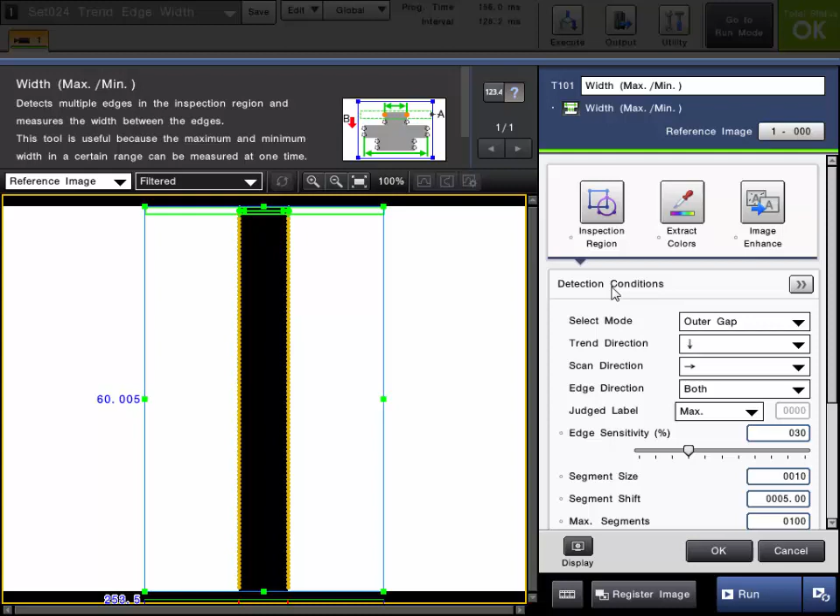The next step then is to set up the detection conditions for the Trend Edge Width tool. So one of these settings is called the mode. You need to select which mode you're going to use. Now, when you're using a rectangle or rotated rectangle inspection region, the mode will be either outer gap or inner gap. And this really only makes a difference if you have more than two edges. In our example, we only have two edges, so that's the only edges we have to work with.

But if you had a part that had more than two edges, like a part that was hollow, where it had at least four edges, you can choose to measure the outermost distance, which would be the distance between the outer two most edges, or you can change this to inner gap, and what that will be is kind of an inner diameter, if you will, or inner gap, so the distance between the inner two most edges. In our example, like I said, we have two edges, so it doesn't really matter, but we'll go ahead and leave it at outer gap.

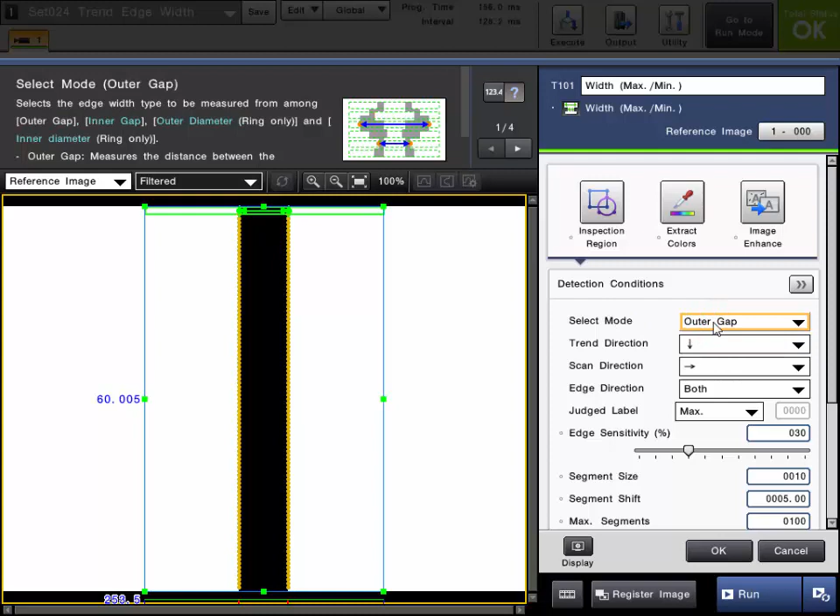Now the trend direction is the next setting here, which is already set up the way we want it, but it's the way it will break up the region into many smaller segments and perform those edge width measurements. So right now it's set for top to bottom, but you could also choose left to right. But top to bottom is what we want, so what it'll do is it'll start at the top, break it into a segment here, shift down by a certain amount, perform another segment measurement here, and so on.

So it'll perform a bunch of edge width measurements starting from the top and working its way down. You can see that's indicated by these yellow points here. Each one of these pairs of yellow points here is an edge width reading, so it's performing many edge widths all in one.

In this setup, we have some nice clean edge points to work with, so we don't really need to adjust anything. But in the actual setup, if you need to, you can adjust all the detailed edge detection condition settings like scan direction, edge direction, etc.

You can also adjust all the detailed segment conditions like segment size and segment shift. We're going to leave these the default setting, but if you needed to detect finer details, you can change the size and shift and max segments accordingly.

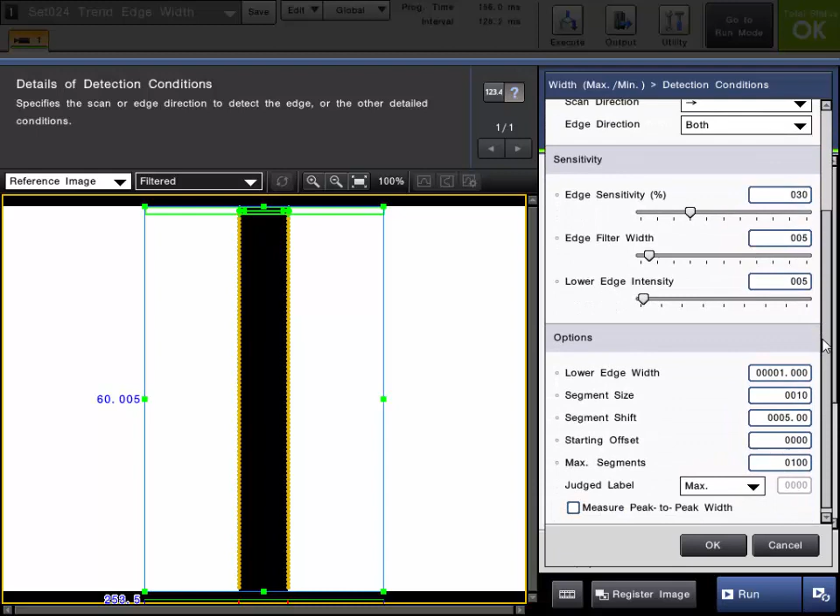You can also go into the detailed detection conditions here, and one setting that's unique to the Trend Edge Width tool is called Lower Edge Width setting. This is basically a filter condition where if you have some noise in your detection where you want to filter out a width of a smaller size, you can set that here.

Default set to 1, but for example, if I set this to 10, it would eliminate any width measurement that was less than 10. So it can be used to filter out some unwanted conditions there.

The last step then is to just simply set up your judgment conditions, which is the pass-fail criteria of the tool. As you can see, we have the measured values displayed here, the minimum width and the maximum width. In this case, it's the perfect golden part, so the width min and width max are identical, but it depends on the part measurement. So we could set tolerances accordingly.

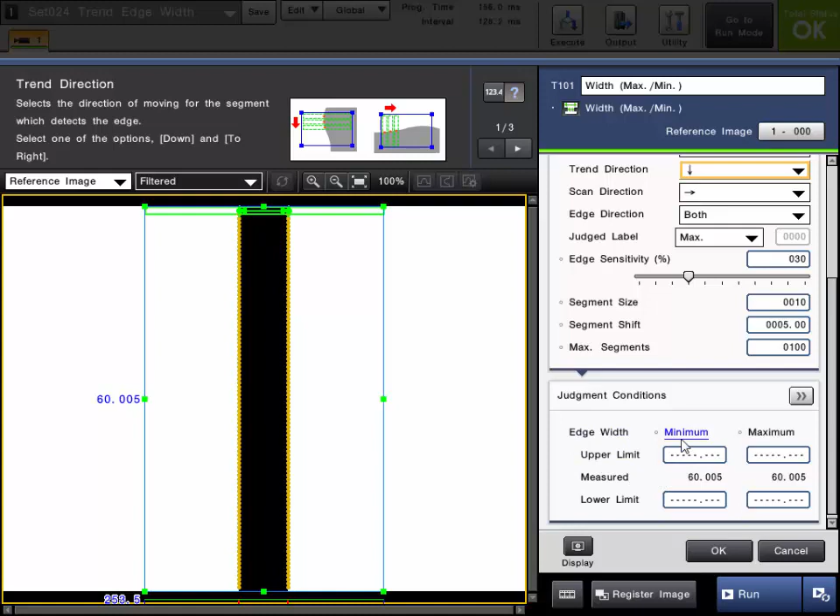So if 60 pixels was our ideal part and we wanted to fail it if it got, let's say, 5 pixels bigger or 5 pixels smaller, we can set the limits accordingly. So for the minimum width measurement, we'll go ahead and set the low limit. In our example, if we want 5 pixels, we'll set it to 55. So if any of the edge width measurements fall below 55, it will fail.

And on the upper end, we'll set an upper limit on the maximum value. So again, we'll set this to 65. So if any of the widths that are measured go above 65, it will fail. Now, if that's all you want to set, you're ready to go.

But if you want to go into the detailed judgment conditions, another setting that you can set is the detected segment condition here. In other words, how many measurements are being taken. So in this case, you can see we're measuring 95 edge widths. So 95 of those segments have a valid edge width measurement.

So if we want to detect a breakage, let's say there is a break in the part where the width measurements were okay, but there's a break, we can put a limit on the detected segments as well. So in this example, I'll go ahead and just put a lower limit of 95 on my detected segments. So if there's any breakage at all where we do not detect a width, it will also fail the part.

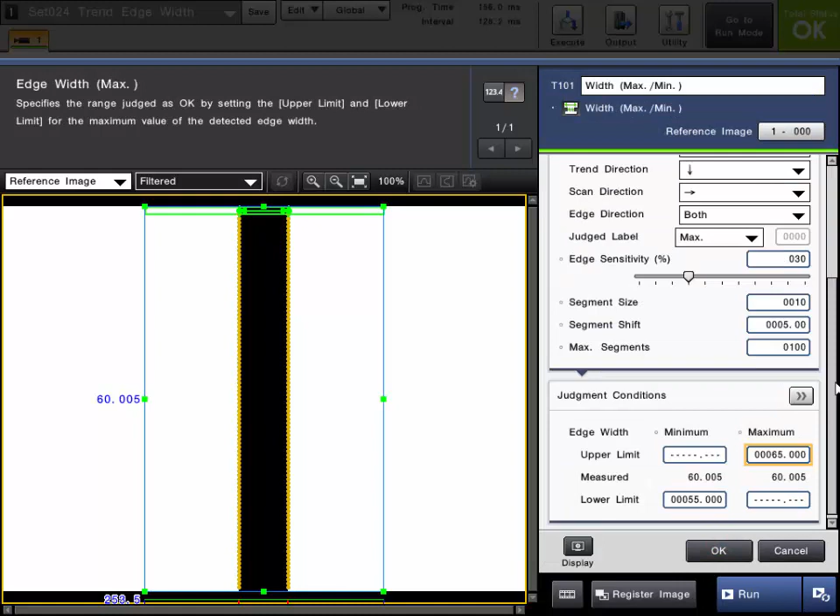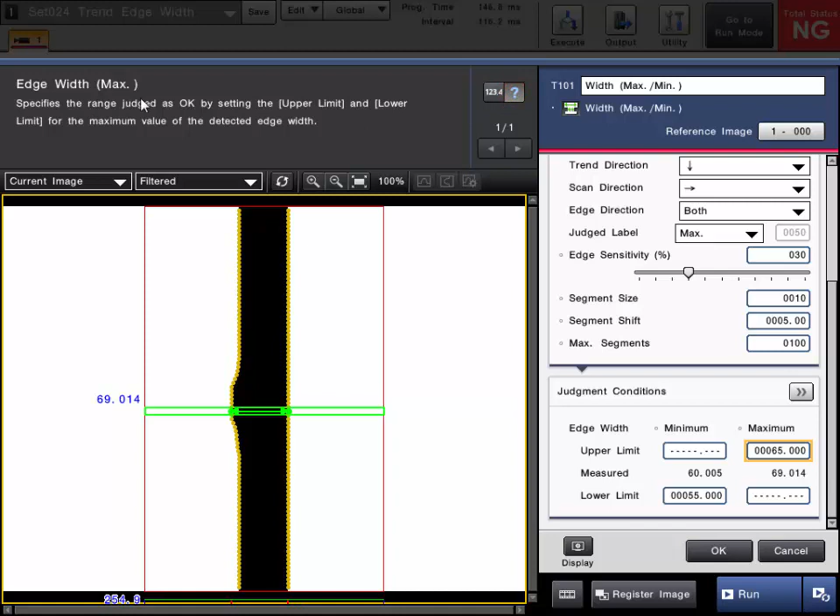Now, we've established our tolerance off the reference image, but while you're in the screen, if you want to work off of some of the current images, you can actually trigger on some parts and confirm measurements on actual parts, because the measured value will update on the current image. Also, up top here, as a default, it's showing you a little help file explaining the setting, but if you click this numeric icon, it will show you the numeric results of the tool as well.

So you can see in this example here, the maximum width has failed our limit, so it turned red and failed the tool. If I run through some more parts here, here's another example of a min width that is failed, and another min. And here's an example where we have a breakage in the part, so it failed the detected segments for that limit that we set.

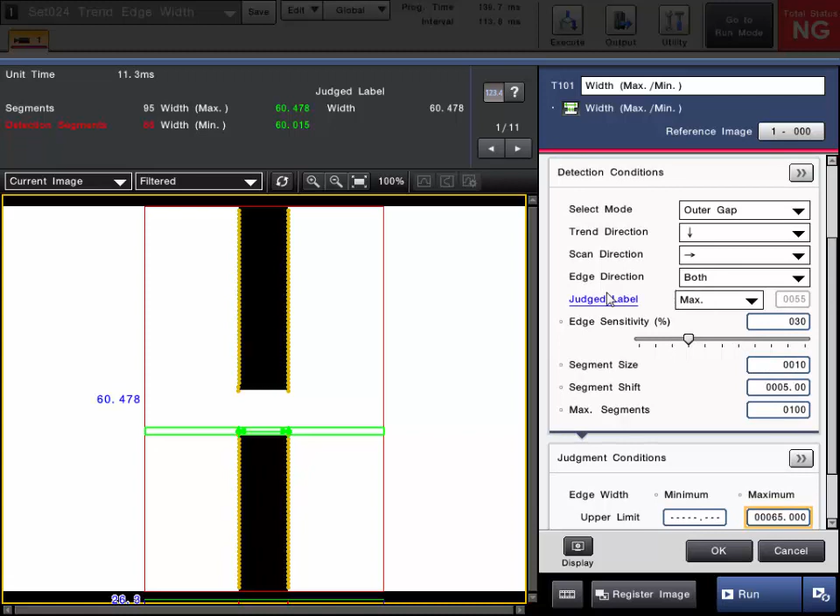Now, by the way, the value that's displayed in green is the Judged Label. So if I go back up top here, the Judged Label is set for max as a default, but you can also set it for min, or you can specify a specific segment if you want. It doesn't affect the operation of the tool. It's still going to measure the min and max reading, but it's whatever main target you want displayed. So it just depends on how you want this tool to operate.

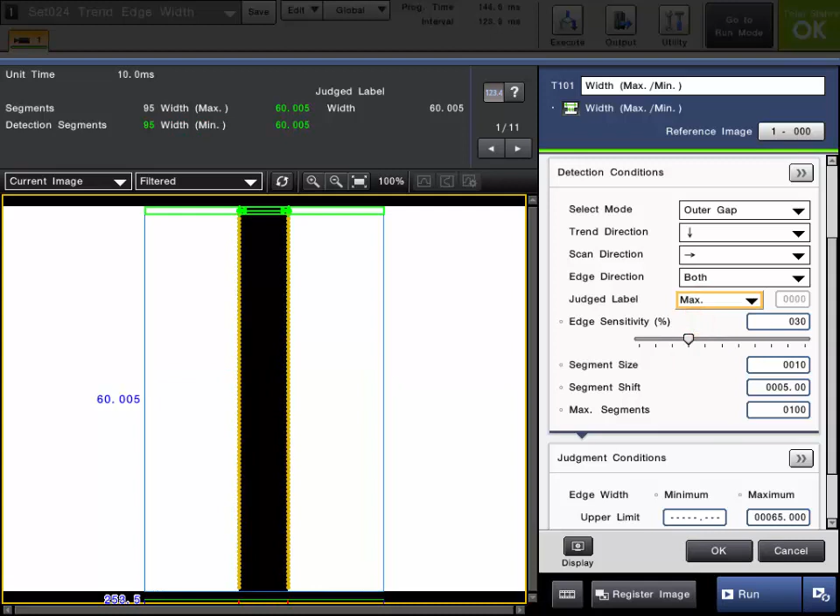So if we set it for min, for example, it will highlight the min point detected. But if we set it for max, and I'll show you this other example here, it'll show the max reading. So that's what that box in green is. It's the judged label.

Click OK when you're done setting all the different parameters, and the tool is now complete. And you can also confirm the operation.

While you're in run mode, there's a couple different views of this screen, as you can see here. One of the views is called Raw 2, and that's just the raw image displayed with the graphic. If you want to see all those yellow dots of the edge points, just change it to the filtered image, and it will display all the edge pairs for you if you want to see that. So that's just the filtered image.

For our next example, we'll use the trend edge width tool to measure the diameter of a round part, like a washer. So what we're going to do is we're going to add the tool from the measured width subcategory of dimensions geometry and diameter.

The first step with any tool setup will be to perform the image registration. What this will do is store what's called a reference image in the program settings, and you can use that to set up your tool. All you need to do is run some parts if need be, and once the image is on the screen, just simply click register.

The next step then is to set up your inspection region of this tool. When you choose the Trend Edge Width tool from the Dimensions Geometry category and diameter, it's geared for circular type measurements, so your only choice will be ring or arc. In our example, we have this washer here, and we want to measure the min and max diameter around the whole part. So we'll go ahead and set up our ring centered around this part.

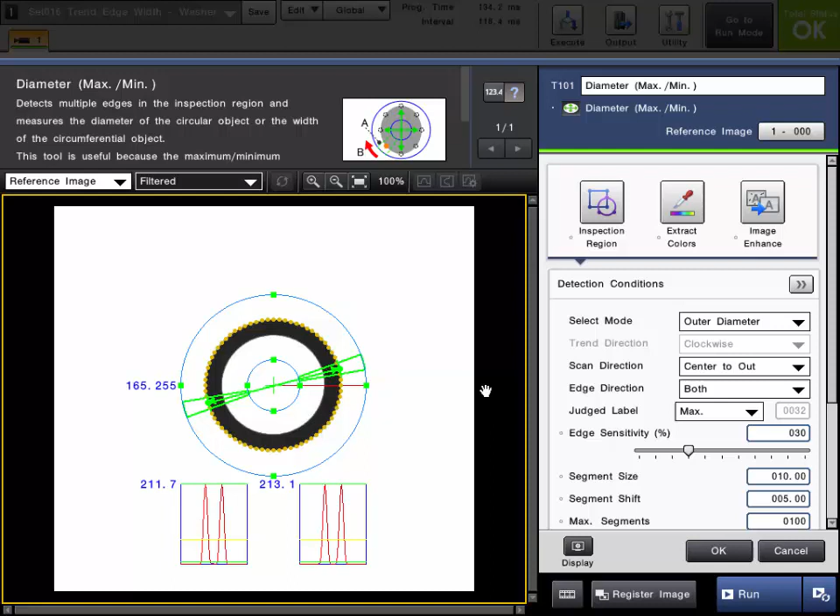The next step then is to set up the detection conditions for the tool. When you're using Trend Edge Width with a ring or arc, you have a couple extra modes here. One of them is called outer diameter. So what outer diameter will do is basically scan across the entire circle and give you the distance between the outer two most edges, and hence outer diameter.

If you want the inner two most edges, you can change it to inner diameter. So what it'll do is, again, kind of scan across the entire ring and give you the distance between the inner two most edges that it finds here, as you can see here.

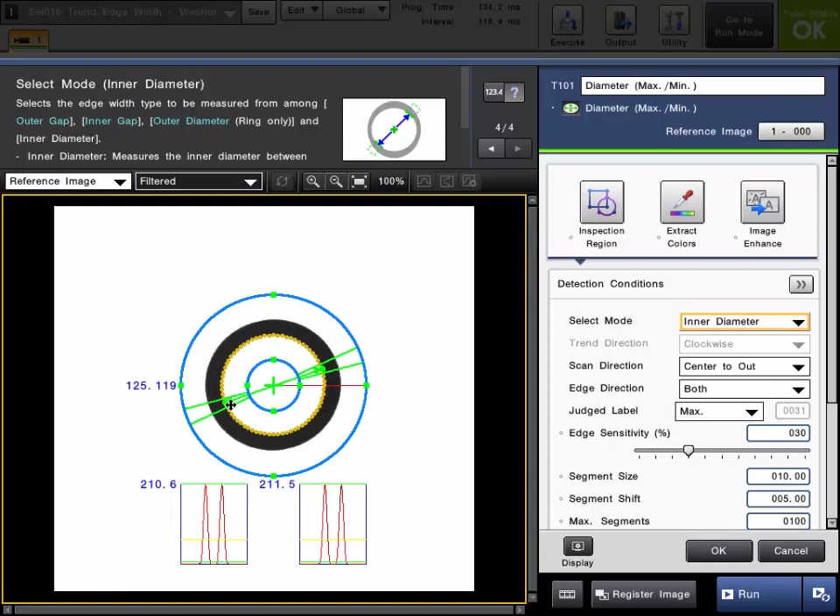Now the other two choices are outer gap and inner gap. So what outer gap is, instead of scanning across the entire circle, it will just do a radius type scan radially, and it'll give you the distance between the outer two most edges detected in each little radius scan, if you will. So again, the outer two most edges, and inner gap is the inner two most edges of the, again, radial scan here.

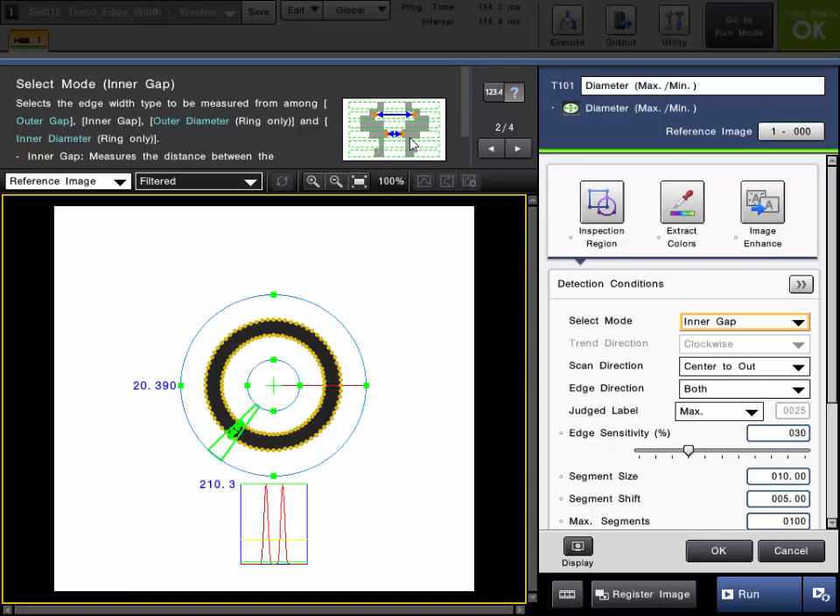Now in our example here, we only have two edges in an individual radius scan, so inner gap and outer gap are the same. But if we had multiple edges, like 4 edges for example, it would be the distance between the inner two most edges. So you select the mode according to the application.

In this example, we're going to go ahead and put it on outer gap, so we want to measure radially just this outer gap of the part all the way around. So we want to make sure this width of the washer is consistent all the way around the circle. You can then set up all the edge detection conditions as necessary according to the application, like scan direction, edge direction, and sensitivity.

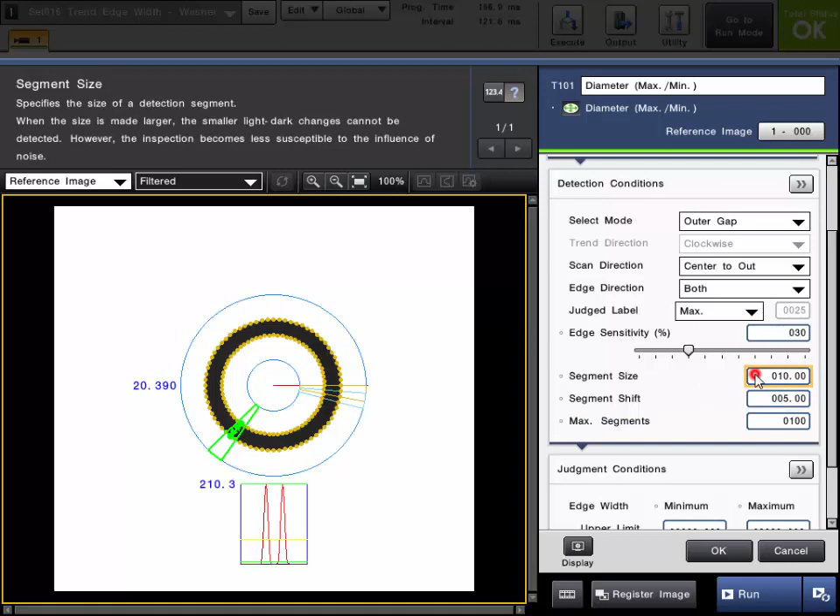Next, in the detection conditions, you could set the segment size and shift of the Trend Edge tool according to how you want this to be measured. You can see the default is 10 and 5, and in a ring or arc case, this is actually degrees, so it's like a 10-degree slice of pie here, if you will. And it shifts by 5 and does it again, and does it all the way around the circle.

If you want to know how many segments you have, just simply click this numeric button here, and you can tell right now we have 72 segments and 72 detected segments. And a detected segment just means it has a valid measurement inside it.

So if we want a little bit more detail, if we want to pick up on finer nicks and dings and things like that, or just finer detail of the part, we can set the shift and size smaller. So in this example, I'm going to go ahead and set the shift to 2 and the size to 5.

So it's a 5-degree piece of pie, if you will. So you can see it's a little bit skinnier slice of pie, and it shifts by 2. So we got a lot more measurements here. But you can see it kind of just stops. It ends. That's the max segments. Right now it's set for 100, so it stopped once it reached 100.

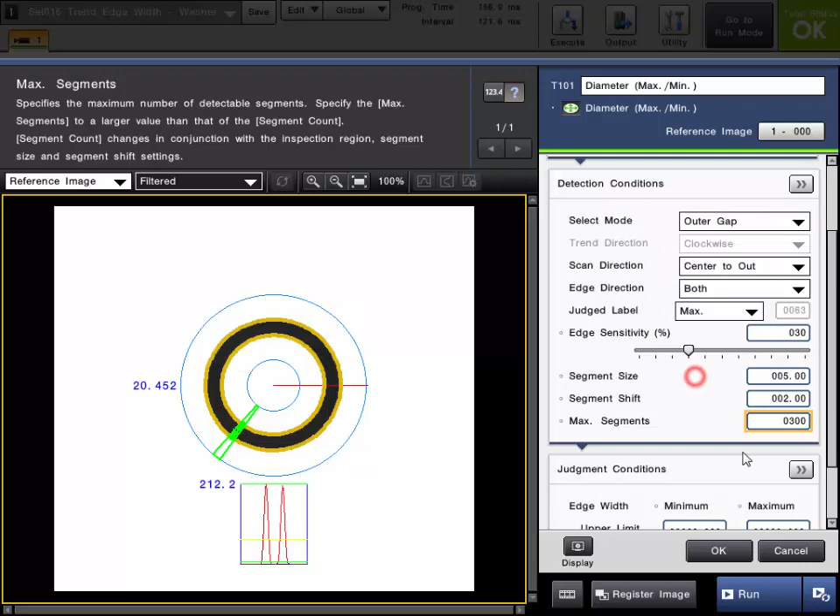So what we'll do is we'll go ahead and set that up higher, maybe like 300, and you can see that encompasses the whole part. Again, we can click the numeric results up top here. You can see we have 180 total segments, and all 180 of them are measuring a diameter at this moment.

The segment that's labeled here in green is what's known as the judged label. So that's the measurement that you see here, and that's also set right here. So as a default, it's set for max. So whatever the max detected width was across this whole region, it will kind of flag that in green. If you want to set that to min, you could set that to min, and it'll highlight where the minimum measurement was. Or you can actually specify a segment as well if you'd like.

So if you want to scroll around and see the different segments, you can scroll through them. Where that could be handy is if you're having trouble finding edges in a certain particular area of a part. What you can do is move the segment number over to that area, and the edge graph will update according to whichever segment you have selected. We'll go ahead and set that back to max for this example.

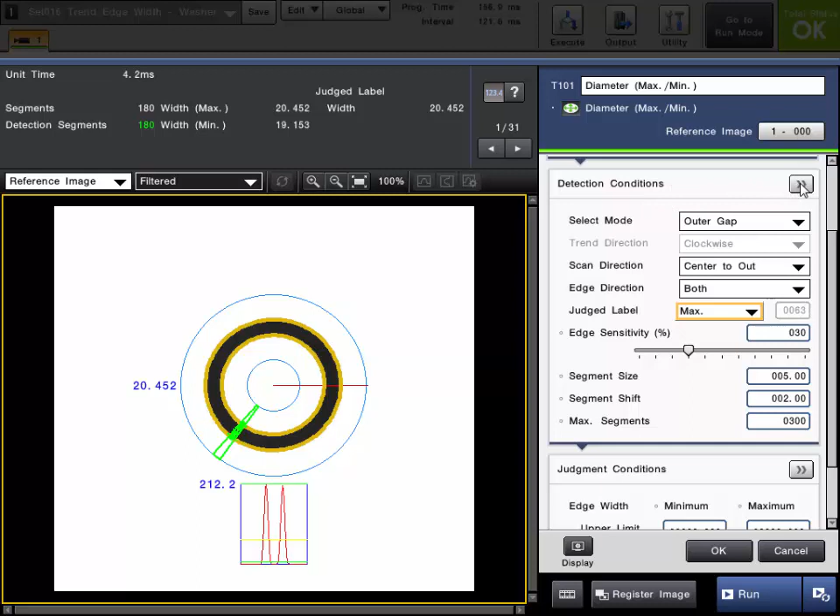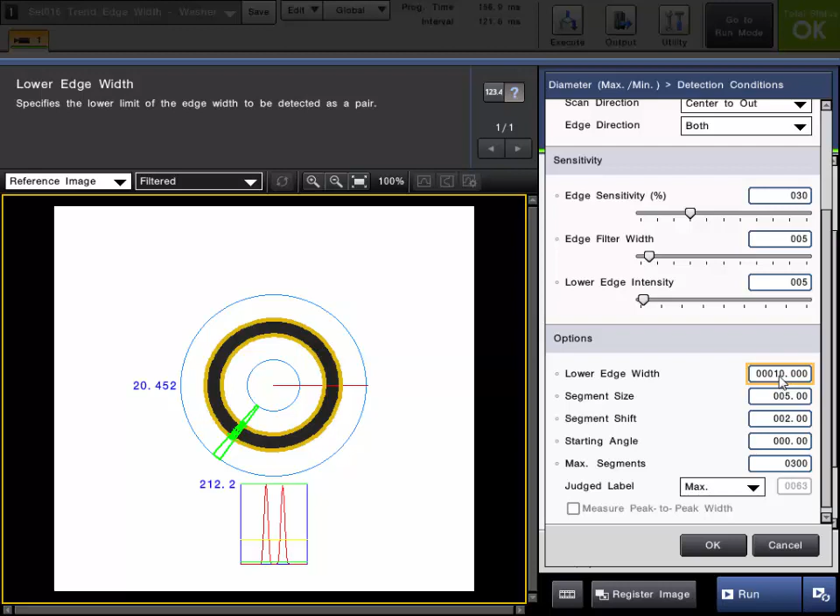One last detection condition that's specific to Trend Edge Width tool, if you click the details here, it's called lower edge width, and this is just a minimum filter, if you will. So if I set this to 10, for example, if you had some noise or some unwanted areas where the width is real small you want to ignore, you could set this number accordingly. So in this example here, it will eliminate or ignore any width that's less than 10 pixels in size.

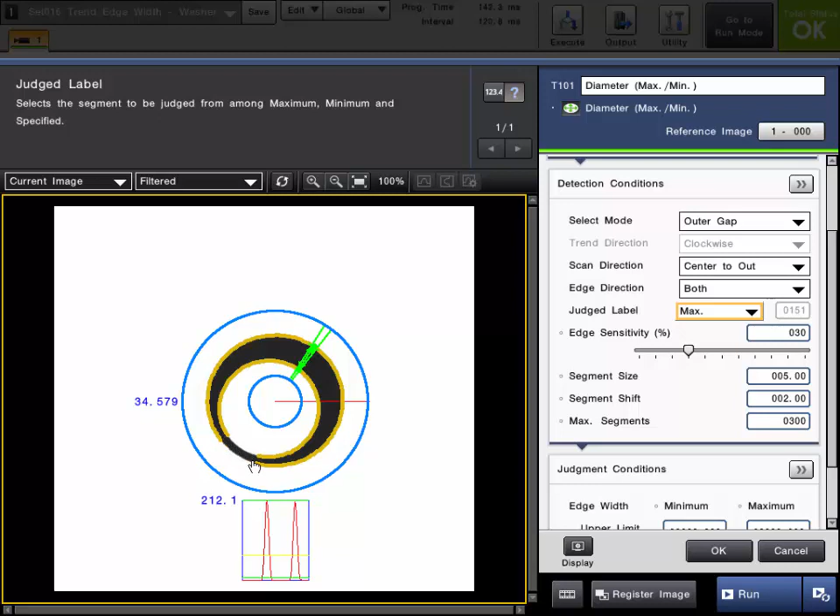To illustrate that lower edge width setting that I just set, I have a part here that has some small diameters, as you can see here, some more small gaps. So you can see it measures all the way around the entire circle, but when it reaches the width that falls below that 10, you can see they're ignored. So I just wanted to show you what that setting is doing. If you don't want that to occur, just leave that setting at the default, which was 1. So I'll go ahead and put that back to 1, and you can see we're getting the entire measurement there.

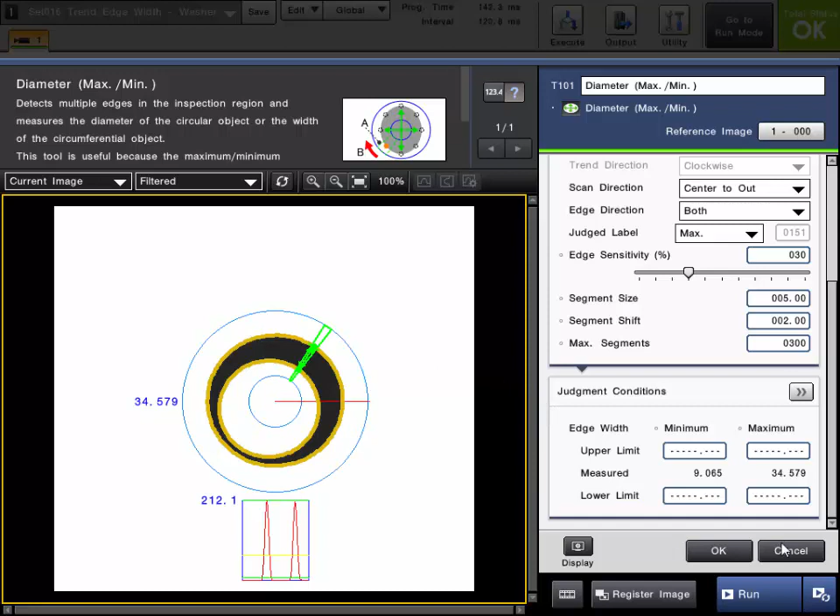The last step then is to set up your judgment conditions, and this is basically the pass-fail criteria of the tool. So we'll put some upper or lower limits on some of these values, and if the values fall outside that range, we can make the tool fail. We can work off the current image, trigger on parts if we want. You can see the currently displayed value here. So this measured value displayed will be whatever image you're working with here. So you can work off the current image, or we can change it back to reference image at any time.

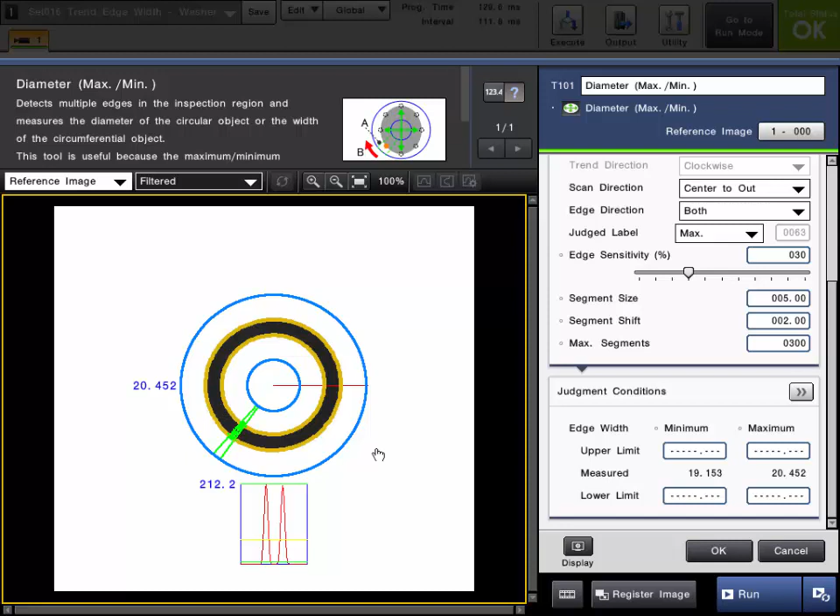So what we'll do is we'll set our initial tolerance off the reference image, and then we can confirm with the actual parts. So what we want to do in this example here is for the minimum edge width, we want to set the lower limit. So if the lowest of these measured values falls lower than a certain value, we want it to fail. So in this example, we'll go ahead and set it for maybe 18. Again, these limits will depend on the actual parts that you're measuring.

And what we'll do is we'll set an upper limit on the maximum value. So if any of these readings get too big, we want it to fail. And we'll go ahead and set that to 22, for example. And again, these values will just depend on the application, but in our example here, if any of those widths fall outside our measurement between 22 and 18, the part will fail.

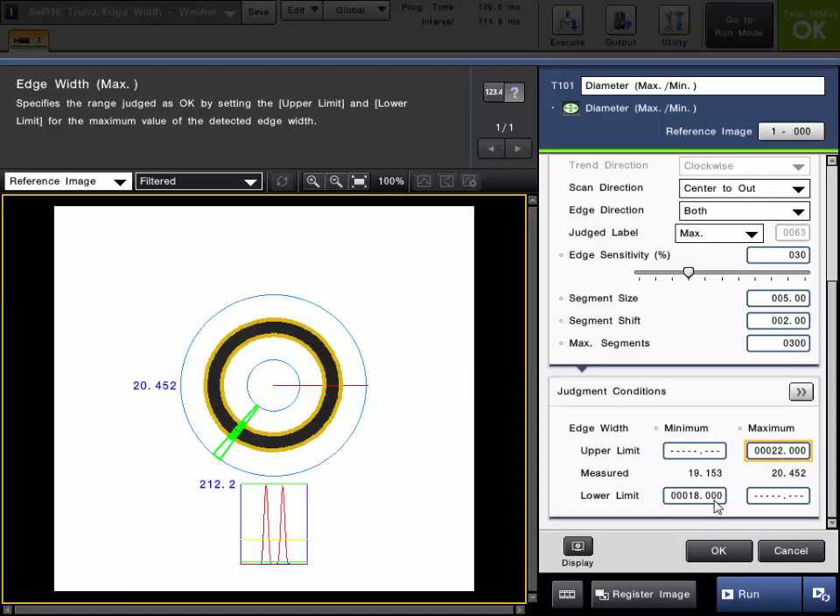If you go into the detailed judgment conditions, you can also set a tolerance on the detected segments. And again, detected segments is how many valid measurements are taken. So in our example right here, we have 180 total segments broken up for this trend edge width tool, and 180 of them are measuring a good reading or a good width.

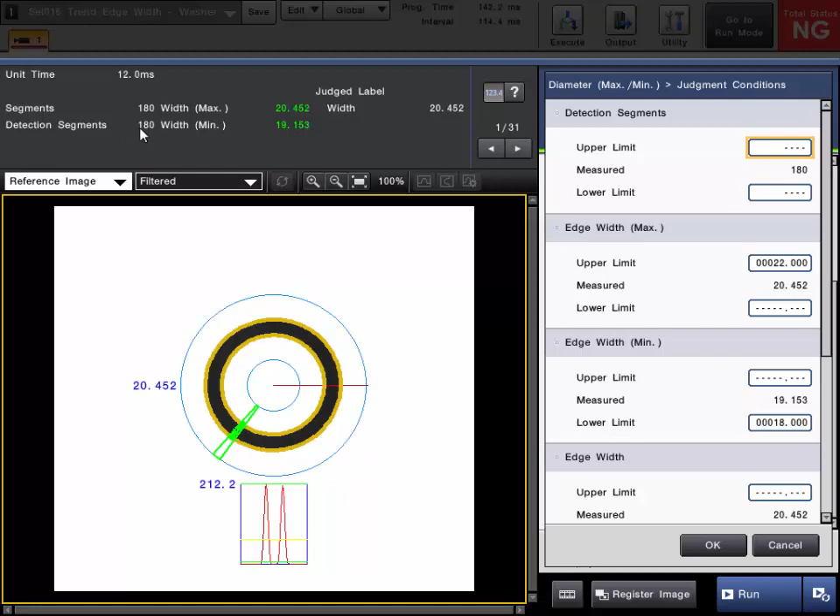If I show you an example of a part that has a missing width, we have one here. You can see right here, it's failing because of the min here, so it's picking up some noise there, but you can see there's only 174 detected segments. So if we want to fail this part, for sure, if it has less than 180 valid measurements, we could put a low limit accordingly.

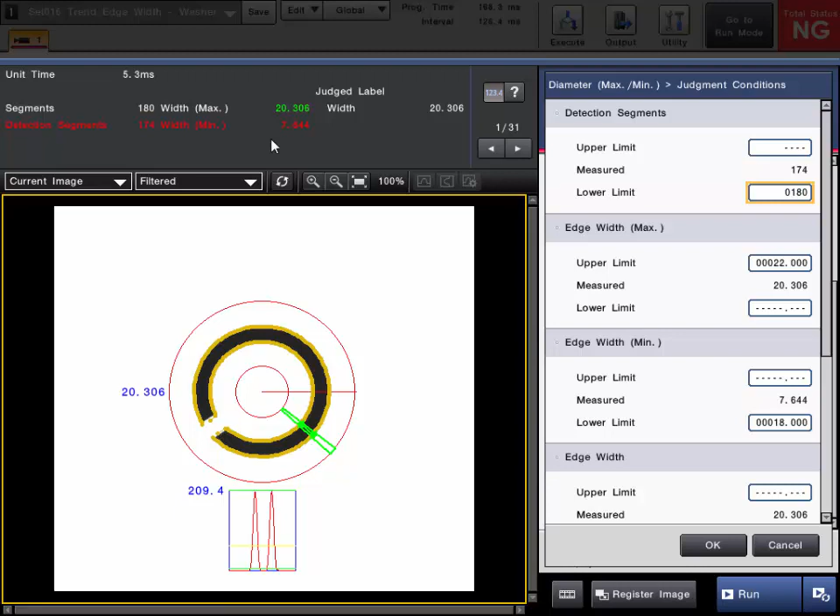So I'll go ahead and put 180 for that, so it'll fail that as well. So just in case, the width very well might be correct, but if we're missing some segments, we'll also fail it because of that criteria.

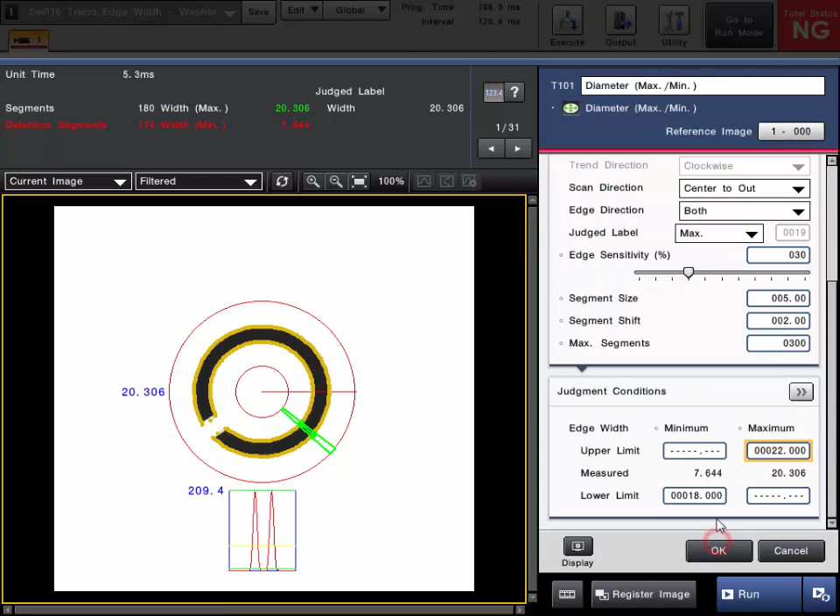You can also set a tolerance on the judged label, which we don't really need to. We've already set our limits on the edge width max and min, but the edge width is that judged label. Right now it's set for max, so it's set up the same. So you could also use that as a limit. But that's it. So click OK once you have set your limits, and then you can confirm the tool operation.

You can see on the good parts, the values are in green for detected segments and max and min width. If any of the values fall outside the range, it'll turn red and fail the tool. You can also notice that we already have some position correction set up ahead of time, so the part will adjust according to the movement of the part.

If you want to view the detected edge pairs or edge points, just change the image to filtered, and it will also show you the detected edge points. They're shown in yellow.

One last example of the trend edge width tool is the peak-to-peak width, which is under the measure width dimensions geometry section here. This is the same exact tool. It's still the trend edge width tool, and it still does an outer and a max and min outer or inner diameter just like before, but what this will do is actually measure the outer two most edge points and the inner two most edge points of all the detected points as well.

So that's the tool. I've already had it added, so just to show you, peak to peak, we'll edit here. I'm just going to show you the difference. The setup's still exactly the same as we just showed you. You set up your size, shift, and all the edge detections as necessary. But what it'll do is, of all these detected points on the left and all the detected points on the right, it will give you a total peak to peak max.

So whatever the furthest point out here is, and the furthest point out here is, what's that distance, and then the inner two most points. So we call that peak to peak width. So in this example, it's a threaded plastic cap, so we can fail it if this total outside dimension is outside our range. You can see we put a limit here. So if I trigger on this next part, the width got too bad.

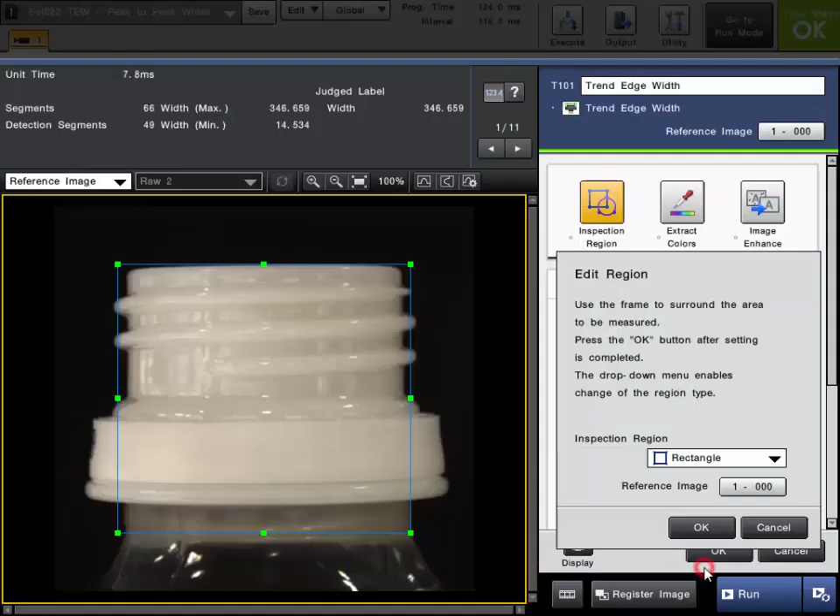All the examples you have just seen are all examples of the trend edge width tool, as it's known in the function list. The only difference in the dimensions geometry category is that it's optimized for certain conditions, as you'd seen, like round targets, linear, or that peak-to-peak measurement type. When you select it from the function list, you can freely choose rectangle or ring or arc right in the tool itself. And you set up all the other conditions the exact same way.

And that peak-to-peak measurement in the third example you just saw, all it is is a toggle that you turn on and off. So if you want to perform that additional measurement that performs that outermost peak and innermost peak, you simply check the box. But the tool itself is the same.

In summary, the trend edge width tool is a great tool to perform multiple edge width measurements across a part and pass and fail it if the dimensions get out of range. It can perform inner diameter or outer diameter, as you've seen in these examples.